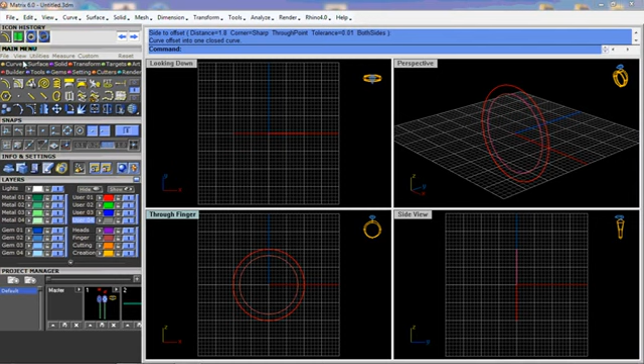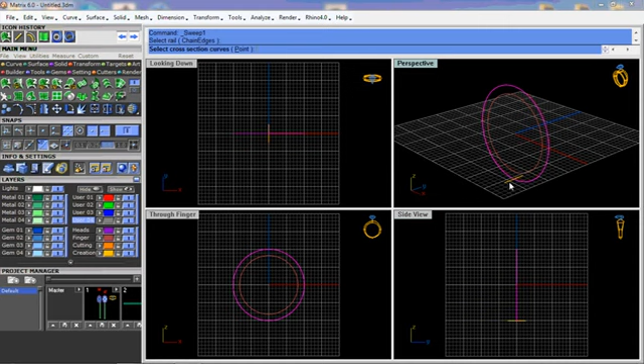Okay, hi everyone. As this is my first tutorial, it's not really a tutorial, it's some tricks and tips for those using Matrix 6, because a lot of people say they don't have Matrix 8, and I receive a lot of messages on Instagram asking me for some small advice.

Okay, so yes, this is embarrassing. It's the first time I make a tips and tricks video on Matrix.

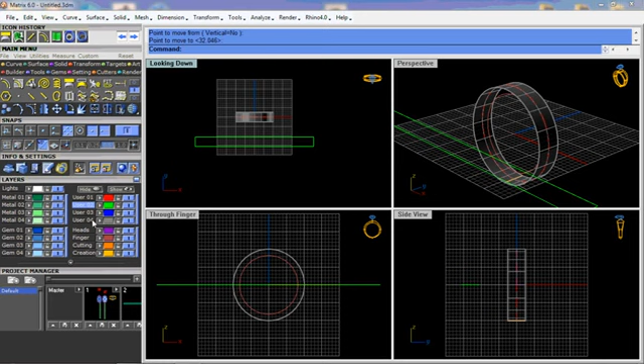Okay, so here I put a ring rail. I made a surface with a 1.8 height, thickness. Make a surface, extract UV curve. Okay, here now I'm going to show you how we can use flow on surface in Matrix 6 like the smart flow in Matrix 8. Okay, here I'm drawing anything, just the curves.

This is really embarrassing. I have a friend, he said the first time you're not going to know what to say, and I think he's right.

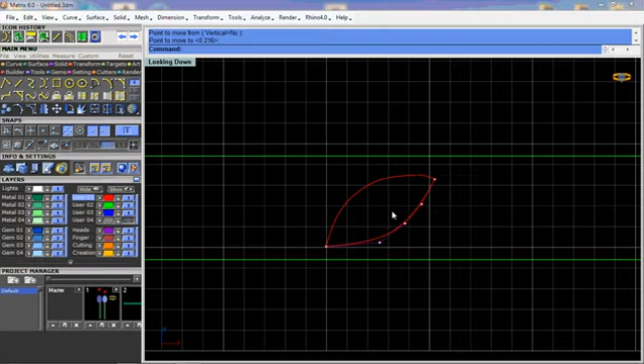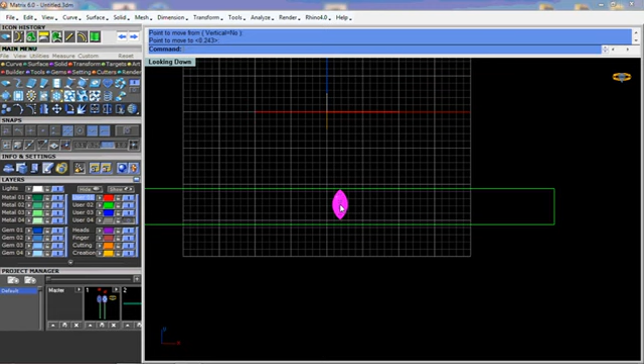Okay, I'm trying to make some marquise shape here. I don't like it very much. I think I'm going to delete this, and this is what I usually do. This is very good to do. Pick up a marquise, any size you want, doesn't matter now. I'm doing all this just to show you a few tips of what I do to make it easier. So instead of drawing a marquise, just bring one, any size you want.

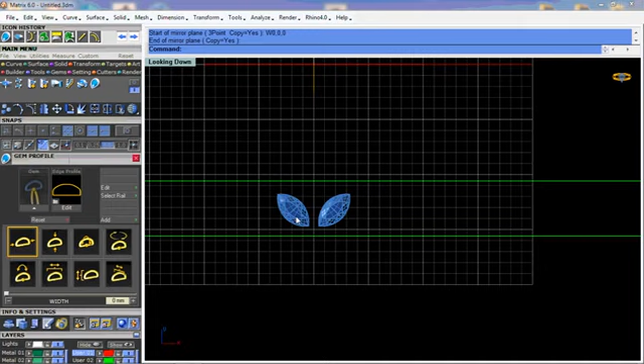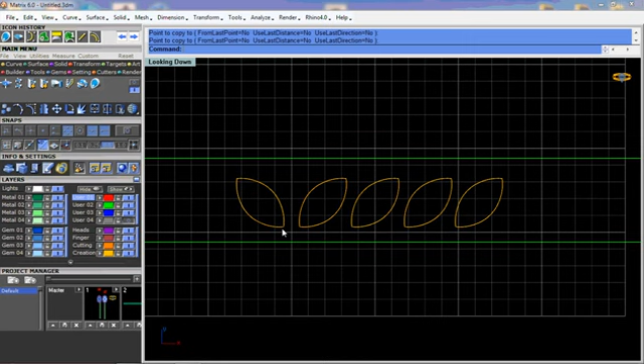I mirrored it. Why did I mirror it anyway? Okay, in the gem, you take the gem profile. And voila, you have your marquise shape. A perfect curve. That's what I do with marquise and pear and anything. Okay, now I'm placing, I don't need this, I will mirror it later on after I finish. Okay.

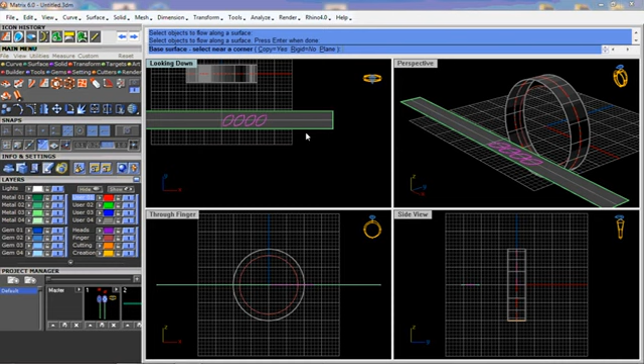Now we have these two surfaces, and now you see I pressed the Rhino history button, and I flow the curves on the surface. Okay, so if you don't like the position of the curves, you just move them and see what happens. It updates the curves that are on the ring surface. Cool, right? I used to do this before having Matrix 8, so anyone still using Matrix 6, you can use this function. This is real cool.

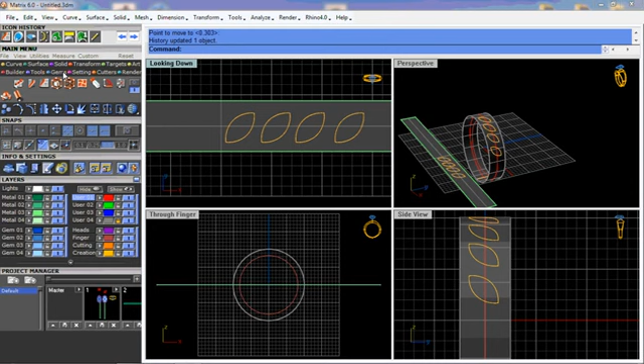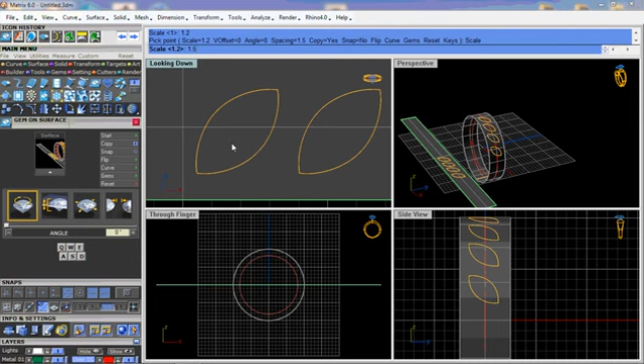Okay, I'm doing it. It's not an intricate design, it's just for showing a few things and giving you a piece of advice later. Even for the gems, you place them here, it's easier. Okay, this is an easy design, but for intricate designs, you will really find this useful. Gem flow, very, very useful. You work on a flat surface, and then you just flow everything on the ring. Yeah.

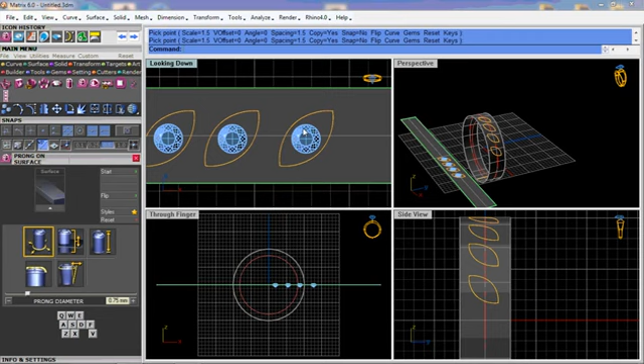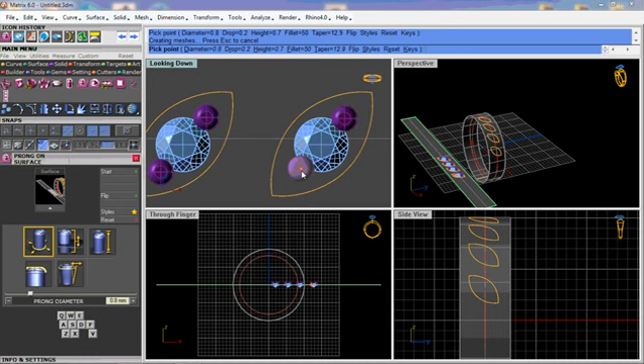Okay, prong on surface. Always make a 0.2 drop. Always. Even more. Sometimes the surface is not flat and the prongs will not cast good if they're not touching the surface. That's why. Put always a drop. 0.2, 0.5, doesn't matter. It's going to go into the metal anyway. Nobody's going to see the drop. Okay, now I'm placing the prongs.

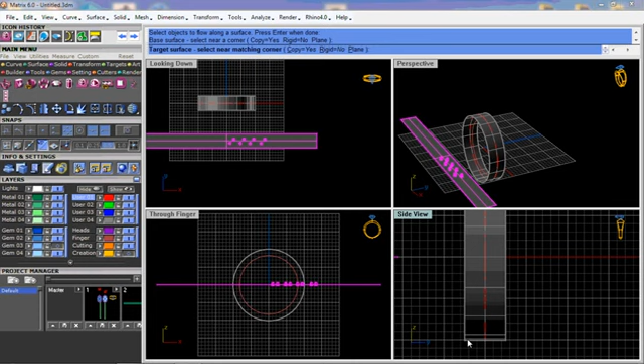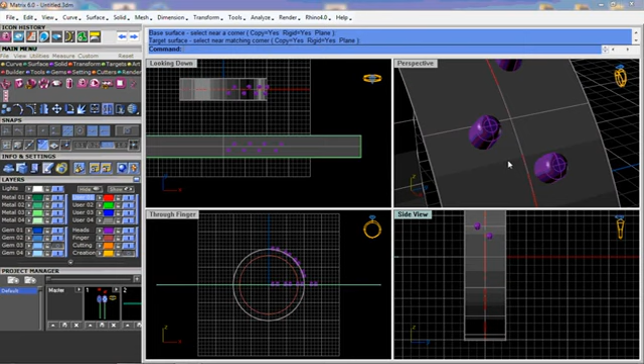Okay, now flow on surface. For the prongs, look what happens if you flow them on the surface, like you did for the curves. Near a corner, target surface. Okay. Look at the prongs. They're distorted. I mean, they don't look nice. In the command line, select object to flow along the surface. Rigid, yes. So the prongs stay just as they are. Look at them. Real nice. Okay?

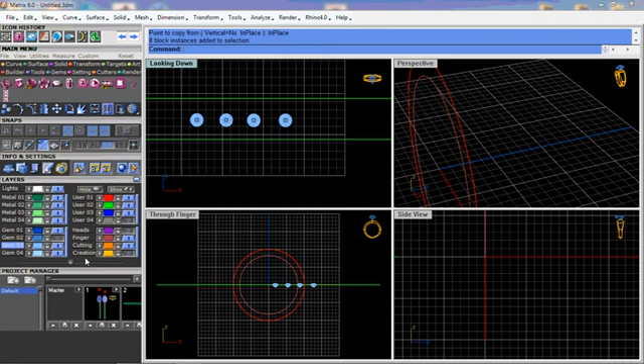Now the gems. The gems, a piece of advice. Always copy the gems. Group them. Make a copy and keep it. You never know what happens. You lose your gems. That's what happens with me. Copy in place. You make 2 groups and you turn off one of them. Anything goes wrong, you can flow again. I don't know if it's a problem with my computer or there's something I don't know. But I always keep a group of gems in case something goes wrong. I can flow them again.

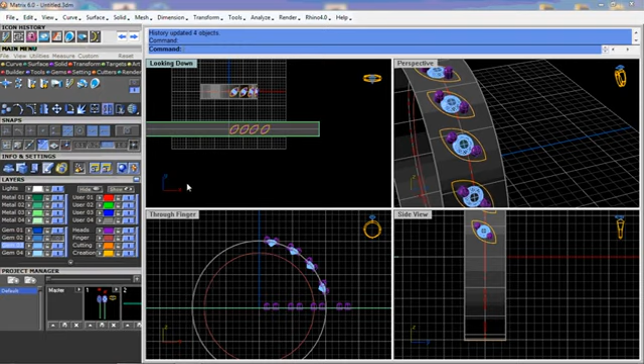Okay, now gem flow in the gem menu. And always keep this, yeah, so you can see if the gems need to be flipped. Okay, they're okay. Sorry, but I'm tired, I'm sleepy. It happens.

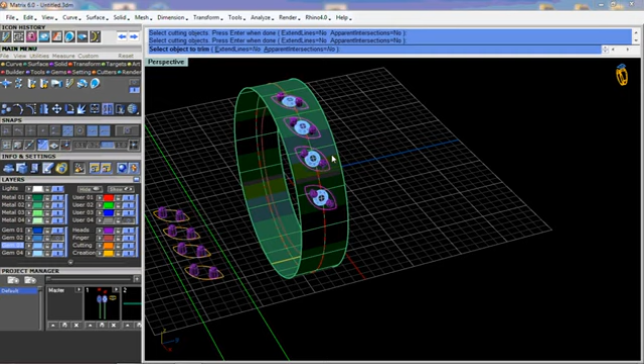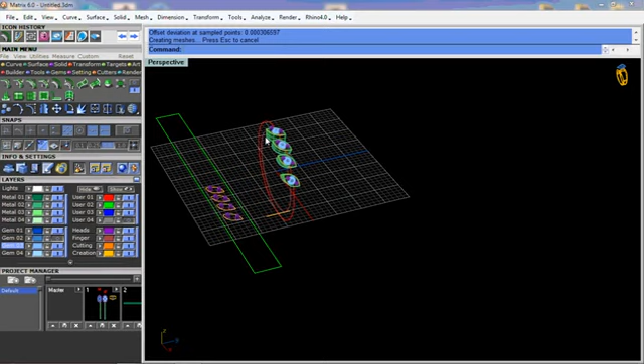Okay, now this surface, the gray one, copy it. Don't trim it. You might need it later. Copy and turn off all the gray. Now trim surface. Select the marquise curves and trim that surface. You have your marquise. Voila. Surface menu, surface offset. We offset the curve 1.8, so these need to be offset 1.8 solid. Okay, you have them. Nice and clean.

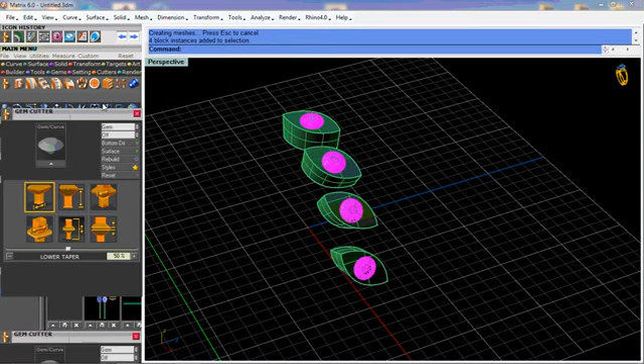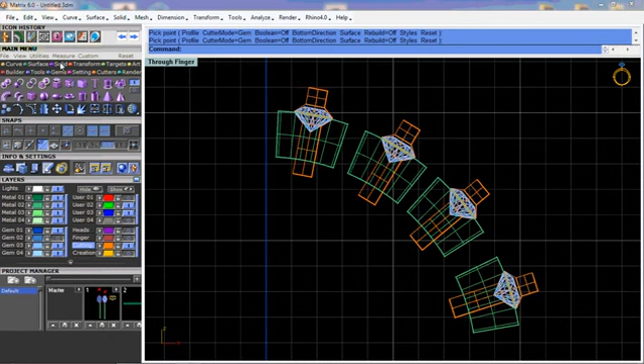Turn off the prongs. Now here's my advice to you. Never cut the prongs. A lot of tutorials, they cut the prongs with the cutter, but the prongs are already very, very small. Sometimes 0.4, 0.5. Here they are big enough, but sometimes they are very small. Don't worry. The gem setter will just push them a little bit and insert the gem. But keep the prongs complete. Don't cut them. Okay.

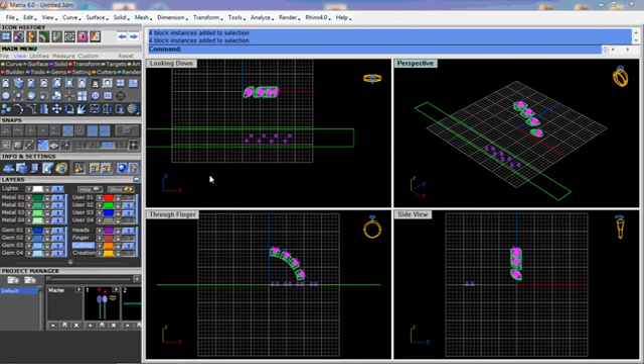Oh, look. Okay, no, it's okay. It's okay. I think I flowed all the gems, but it's okay.

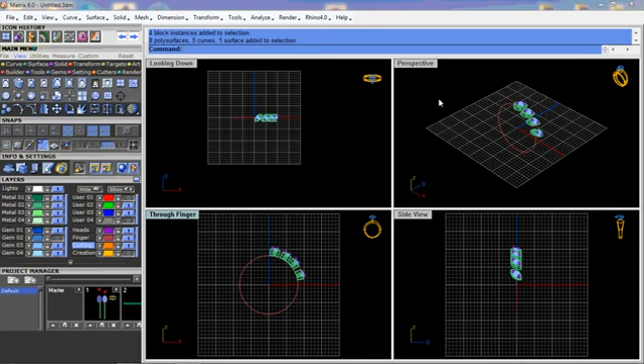It's my first tutorial. Not tutorial, but just small advice, small useful tips. Because I get a lot of questions about these. That's why I thought about making this, and I hope I will make others also in the future.

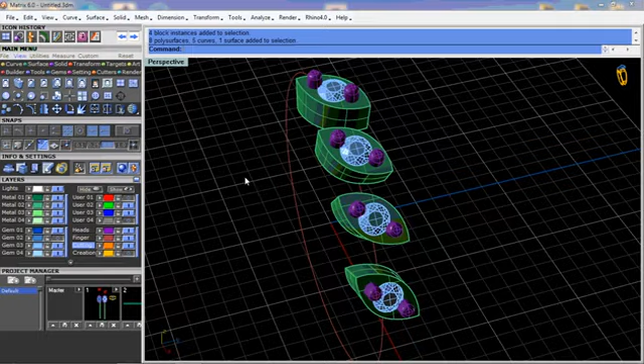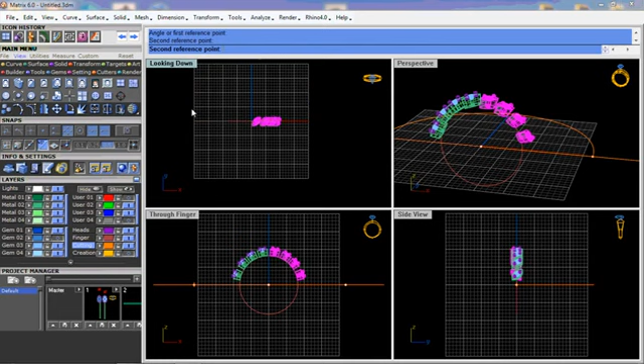Now I think we need a shank, because these marquises are defying gravity. Okay, we're gonna mirror them. Oh no, I don't think. Okay, let's rotate. Rotate with copy from F4. Okay, I like this one. Yeah. Now let's put a profile, any profile.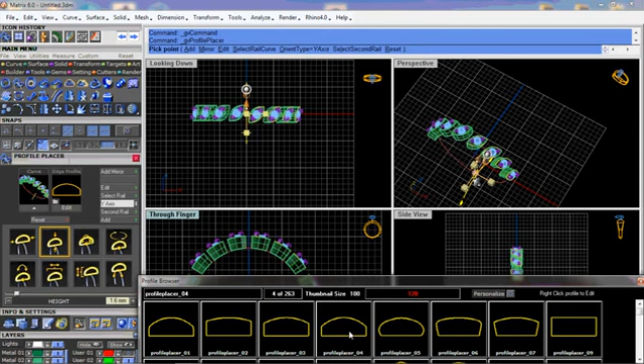I'm just training myself to work and speak at the same time. Usually I listen to music, but today I decided to take a new step and make this.

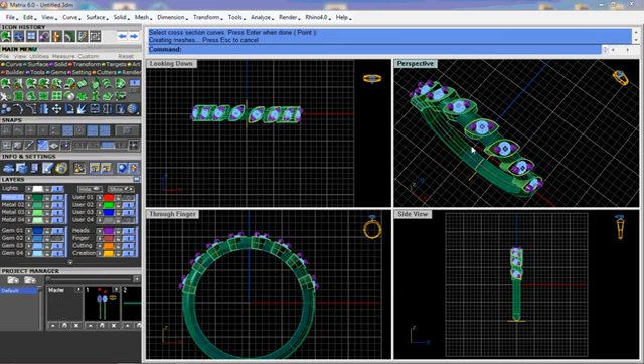Okay, any profile, whatever. I like this one. Let's start with 01 with my tips and tricks video number 1. We take profile number 1, right? Okay, surface, sweep 1. Oh, I think I forgot something. Okay, we boolean the marquise. We made holes, but the shank doesn't have holes. Oh, so stupid of me.

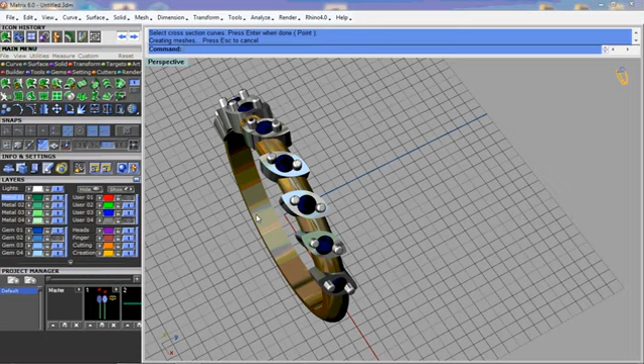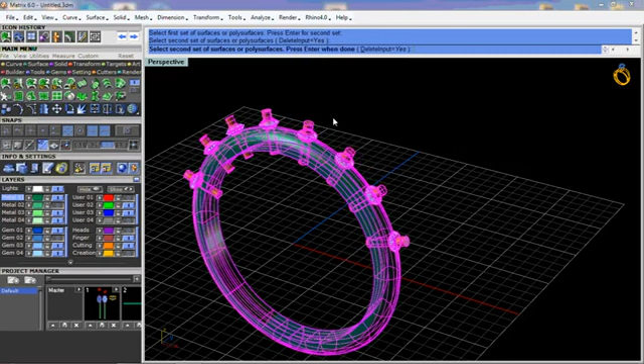Okay, we're gonna arrange this. We'll put colors again. Looks nice. Okay, let's put the cutters back again. And cut this shank so we can see the holes. Okay, let's turn everything on. And this is your ring.